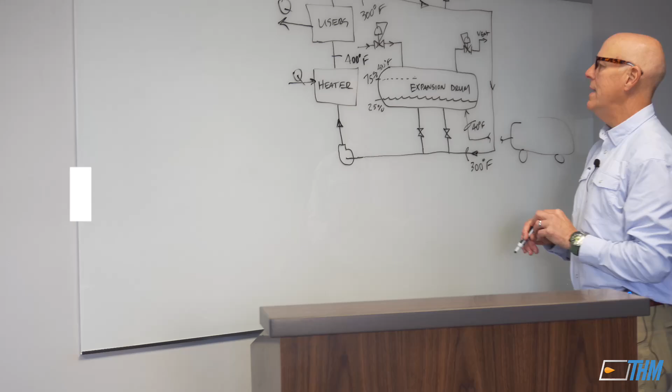And you say, well, okay, what about the spring? How does that work? You call that gas kind of a spring. Well, this is called blanket gas.

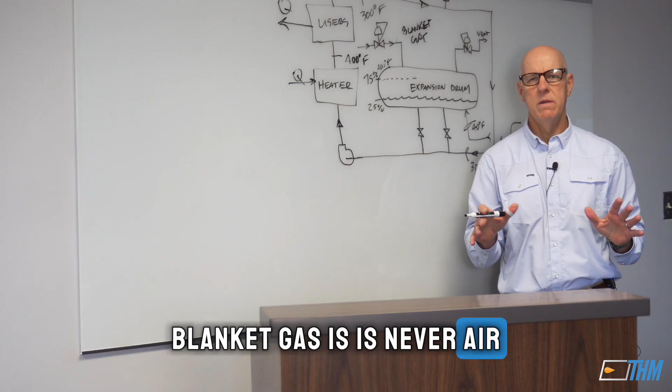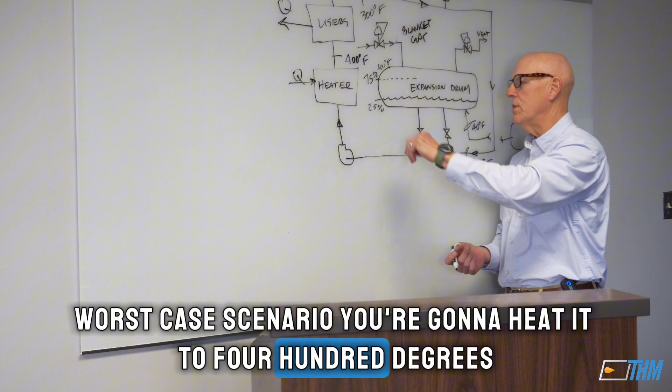And that is what resides above the surface of this heat medium. Blanket gas is never air. The reason it's not air is because this is a heating oil, which is combustible, and worst case scenario, you're gonna heat it to 400 degrees. So you really don't want to have air in here with a little bit of vaporization taking place. Now suddenly you've got a combustible mixture above this and it's not safe.

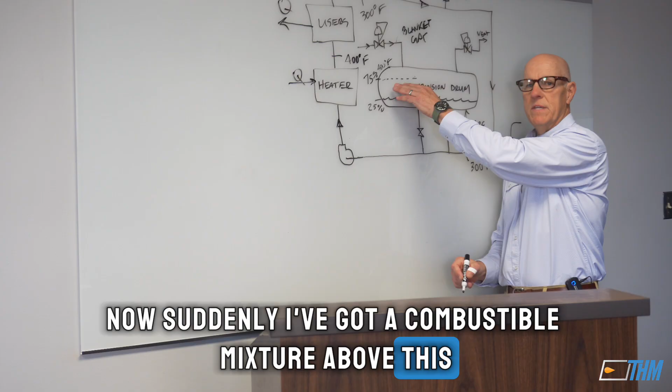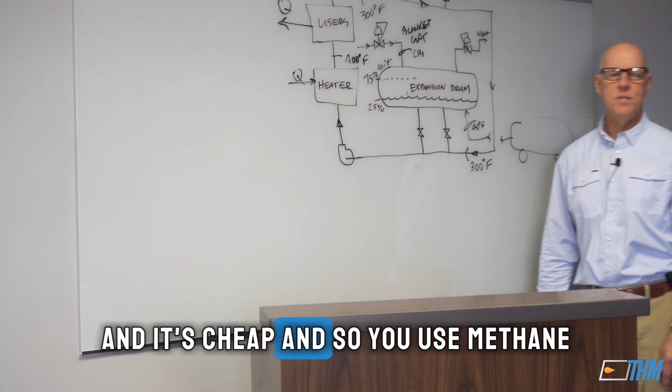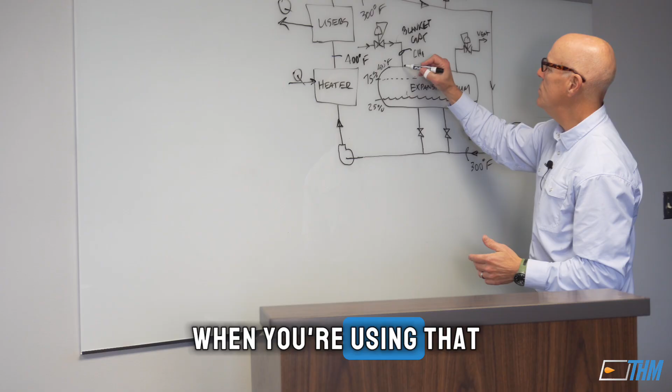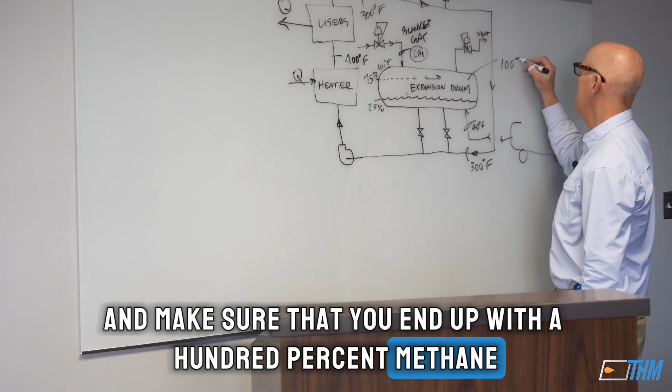So for blanket gas, the gas of choice is methane. That's what's usually available and it's cheap, so you use methane. And you say, well, gosh, that's combustible. Why would I put a combustible gas over what I think could be combustible here? It's only combustible if there's oxygen. So you're gonna use methane in the absence of air, and so now I don't have anything combustible. And obviously, when you're using that, you've got to go through a process of pushing all the air out and making sure that you fill this with 100% methane. So you want to take that time to purge out this air, push it out, and make sure that you end up with 100% methane as your blanket gas, okay?

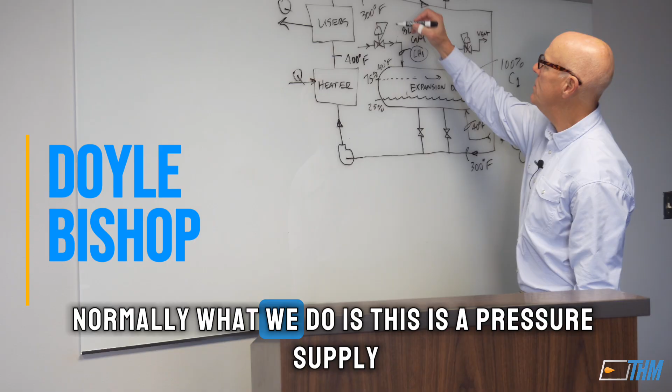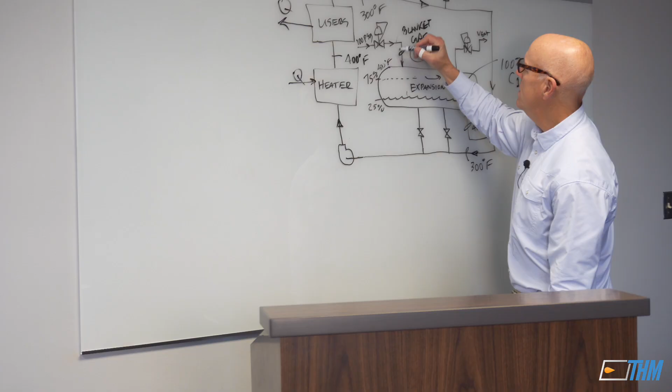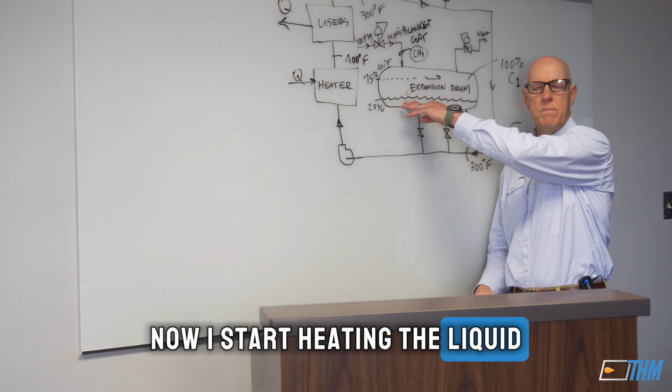So how do you get it in there? How do you keep it so it's regulated? Normally what we do is this is a pressure supply. Let's say you've got 100 pounds here coming in. This would be regulating it down to, let's say, 15. So I'm gonna have 15 on this side of the regulator. And so I start off with, hey, I've got 15 pounds above this liquid. Now I start heating the liquid. Well, when I start heating it, the liquid level goes up and I start compressing this gas.

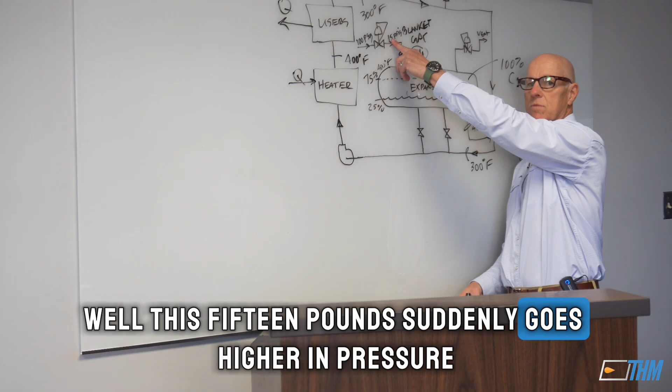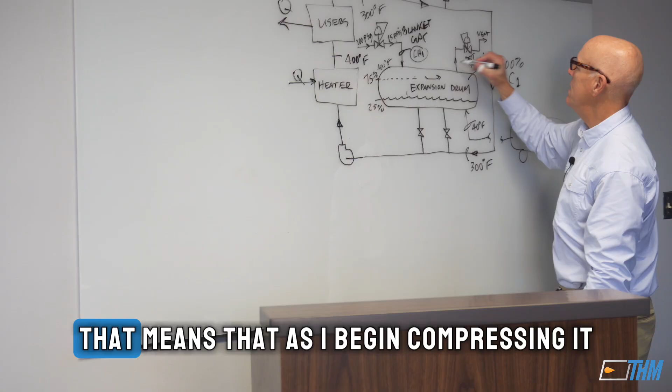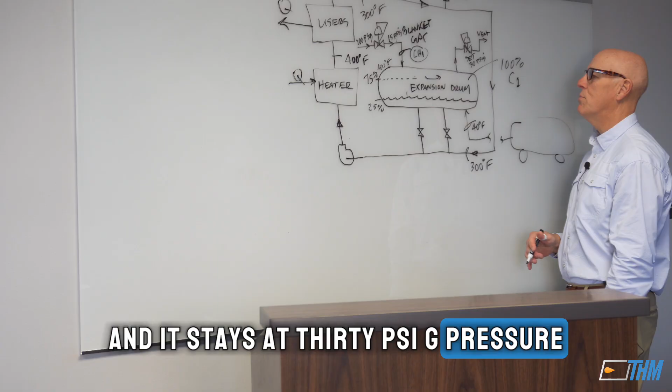And when I compress it, what do you think happens? Well, this 15 pounds suddenly goes higher in pressure. I've got a relief regulator on this side that's set at, let's say, 30 PSI. That means that as I begin compressing it, it begins to move up. I get to about 30, and this expansion drum starts burping a little bit, and it stays at 30 PSIG pressure. If it goes back down, the pressure drops. As it cools, I might have a little more gas pushed in here.

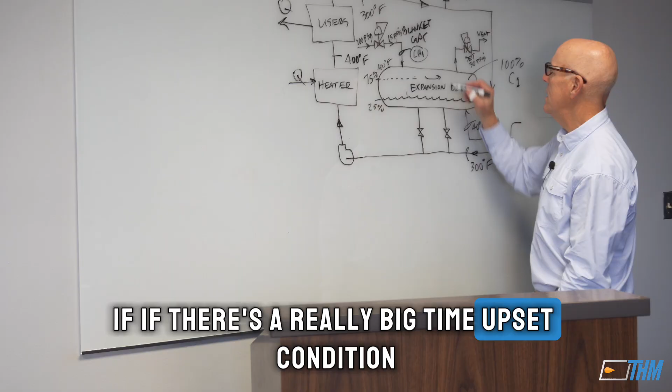If there's a really big time upset condition, you also have a PSV on here. I'm not going to draw that symbol right, but I think it looks something like that. Kinda. That looks terrible, I know that's not right. But it's a PSV, and you would set that, let's say, at 150 PSIG.

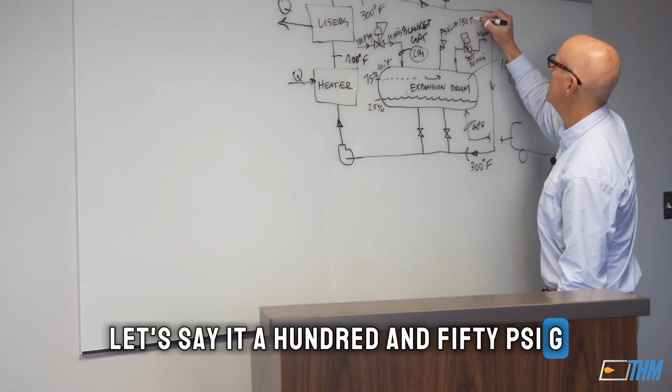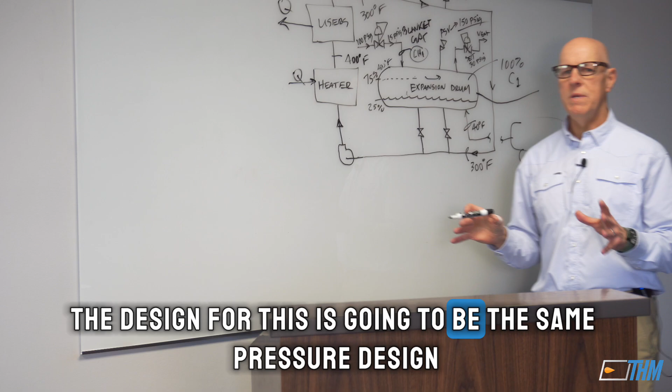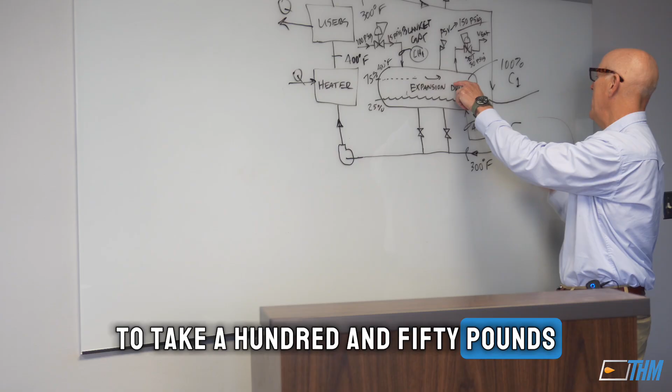Why would you set that at 150 PSIG? Well, the design for this is a pressure vessel. The design for this is going to be the same pressure design that you have for the coil on the heater. So if you design the coil to take 150 pounds, you want to design the expansion drum to take 150 pounds. And so that's your design, and that's what your PSV could be set at.

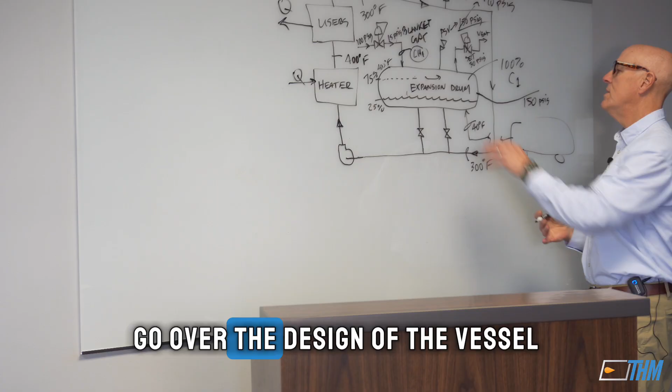Now, a lot of times people will say, well, I'm going to set this PSV at like 70 pounds, just to be safe and make sure I don't ever go over the design of the vessel. And that's okay too, because remember, this vent's set at 30, so you should never get to 70 PSIG unless something failed with this back pressure regulator.

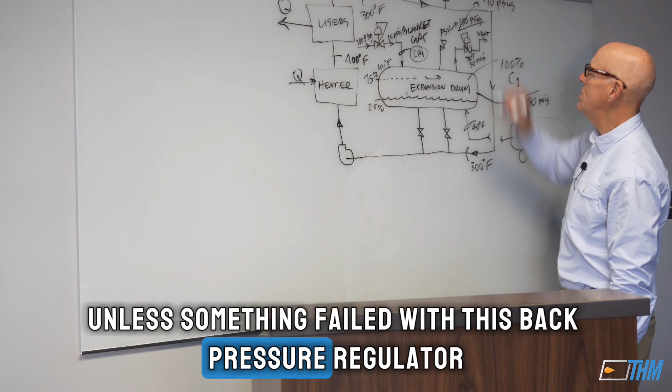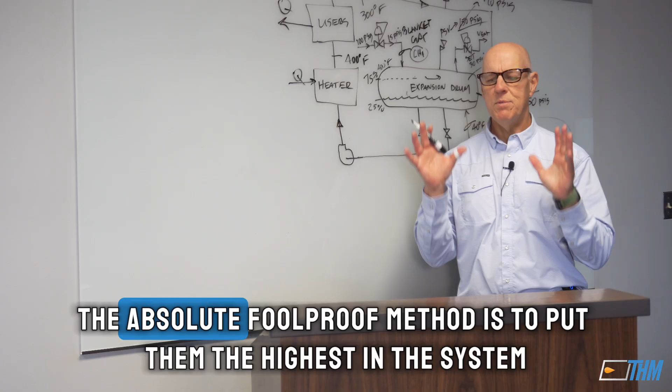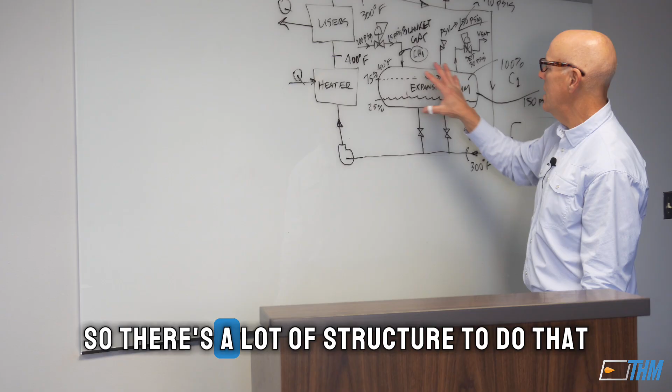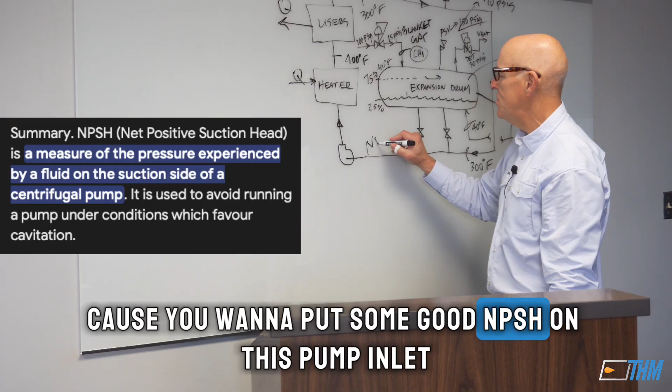One other thing about expansion drums is what elevation do you put them at? The absolute foolproof method is to put them the highest in the system. You can do that. It could be fairly high, it could be 30 feet in the air, so there's a lot of structure to do that. Most of the time, they're not that high. Most of the time they have some elevation, maybe 15 feet, because you want to put some good NPSH on this pump inlet, but normally they're not the highest in the system. Sometimes they are. Some customers want that just as a foolproof way of doing it, but you don't have to.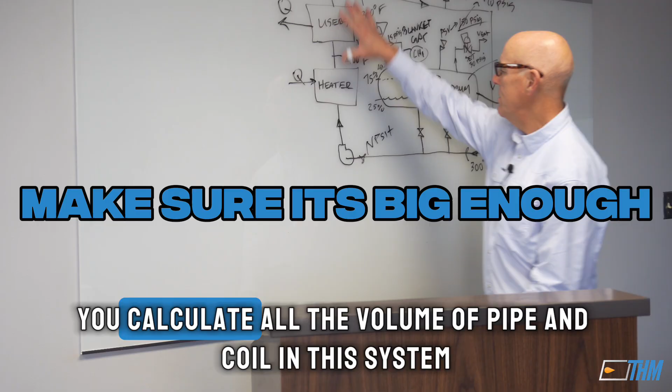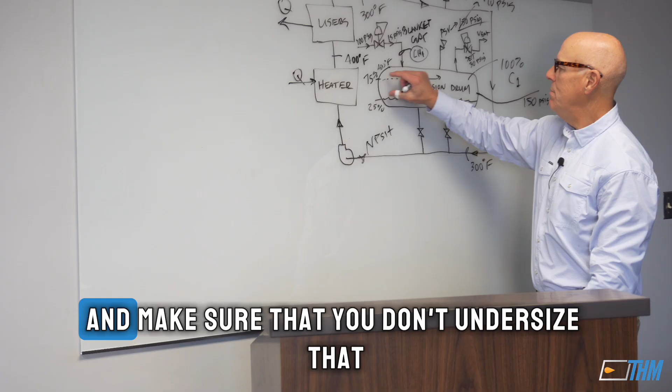Okay, so the takeaway is, one, make sure it's big enough. Make sure you do all your math, you calculate all the volume of pipe and coil in this system, and you do the math of what the density is at 40 versus the density at 400, and make sure that you don't undersize that. And then secondly, make sure that you design it for 150 psi-G, and obviously you want to make sure that it's designed for something north of your absolute highest temperature in your heat medium, and you'll be good.